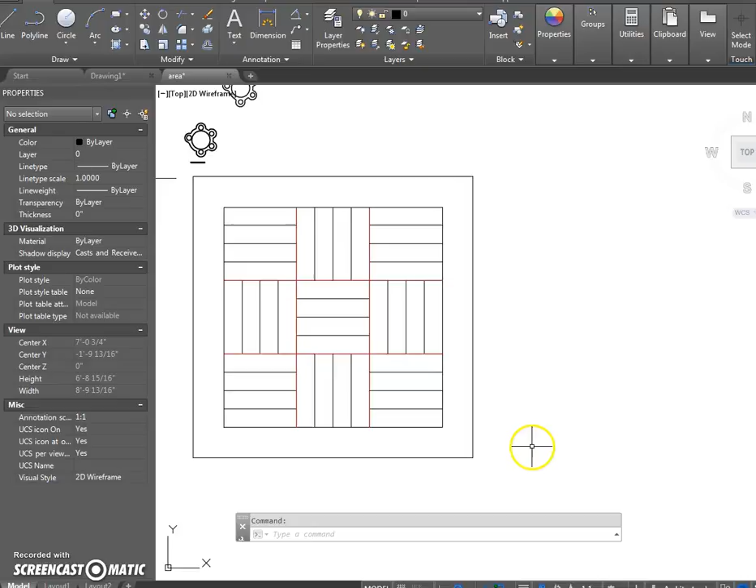Here we go again. All right, so you got these two parts done. Now we're going to do this guy right here.

A little bit different from what you're used to because you're going to use architectural measurements on this one. So the first thing you have to do, yours will say decimal down here at the bottom. Move your mouse down here to the bottom, see this arrow, and click this to architectural. When you do this, you have to type in the actual feet symbol, otherwise you have to convert to inches. It's entirely up to you.

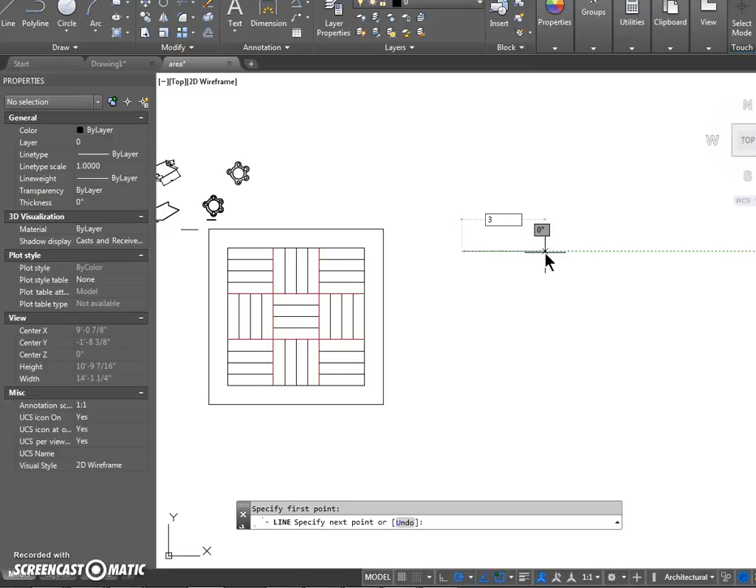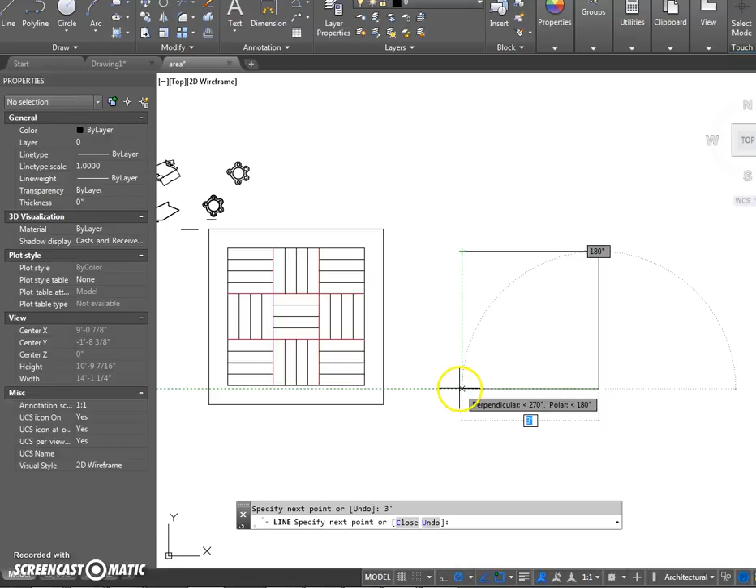Now I'm going to use the O track here to save myself a little bit of work. I'm going to touch this, not click, touch. You see that line, that's the O track. I've gone over this once, but here it is again. So click here, move it up, and click there. I'll give you a second to get that caught up.

Hopefully you're good. All right, so now we're going to offset this. Type an O enter for offset. Hopefully my volume is loud enough on this thing, if not crank yours up. 5-inch offset. Click here, outside. Click here, outside. Click here, outside. Click here, outside. Next question you ask yourself is, how do you attach these corners?

We're going to do a fillet. There's a little bit of a different way to do a fillet than what you guys are used to. You've only done one once, so you shouldn't be used to a whole lot. If you type an F enter, there should be a radius on there. If you set radius to 0, you can click your corners and it will make a sharp corner. Press enter again - I'm just going to press enter again so I don't have to do multiple. Enter again, and there we go.

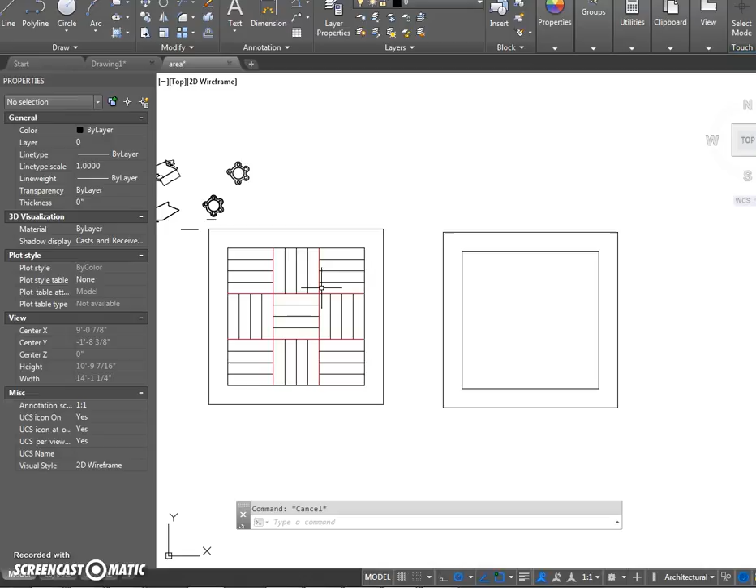Great use of fillet. Okay, next we're going to draw these red lines right here. I made these red just to help us see where we have to do some trim lines here in a moment. So I'm going to offset - it's 1 foot, 12 inches. Offset that over. Remember, you click, you go in the direction of where your arrow should go to, and then you click.

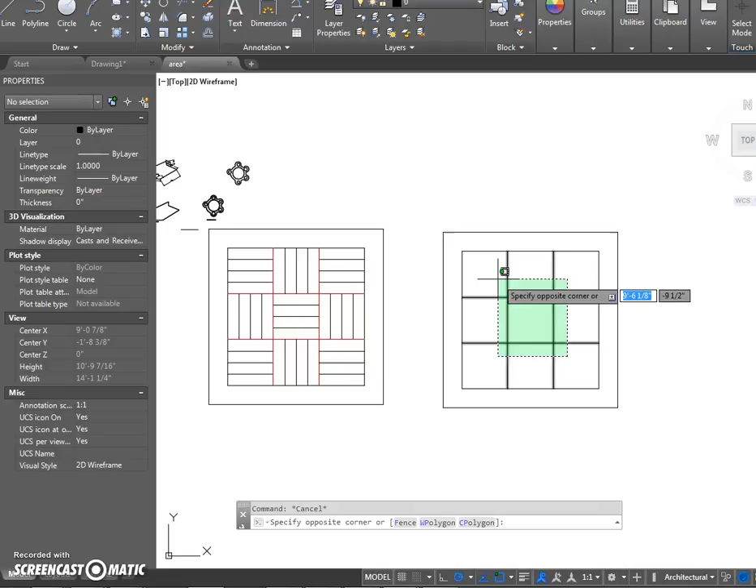Now I'm going to make these red just so I can see them a little bit better. So I'm going to highlight these - I left clicked, I didn't left click and drag, I just left clicked and I got these selected. You go to Properties, and if you click by layer and set this to red, it will turn all those lines red.

So I'm going to offset now, my offset's 3 inches. Follow me. Click here, go out. Click here. Uh-oh, I'm getting lazy, I'm going to hit multiple - much faster. There we go.

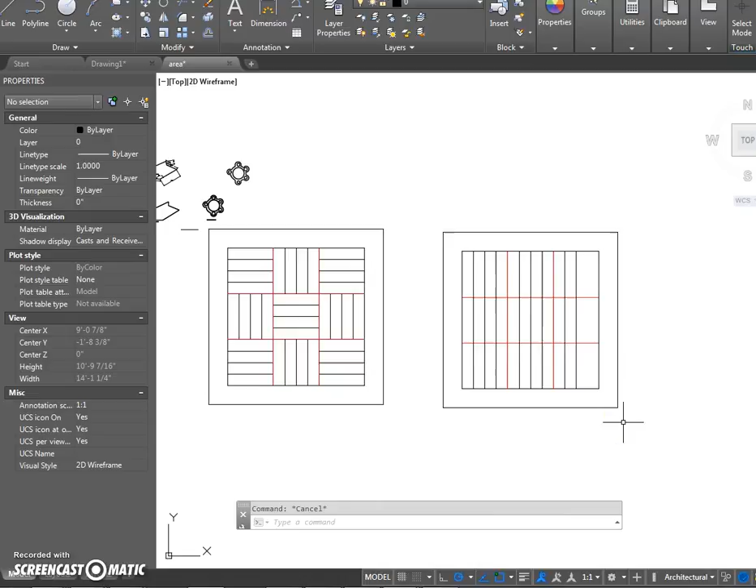All right, so watch this. Trim - I'm going to show you different uses of trim. This time when you do trim, press enter only 1 time. What you're going to do is you're making a fence, so everything I'm clicking now is a fence. It means it's only going to click what's in the middle of these. So I press the enter button now. Now I can click these up here and it won't affect those down below it.

Or I can draw a little box like this. Bump, bump, bump, bump. Oops, I messed up, looks like I forgot a line here. No problem - offset, move this guy over, and there we go. Oops, I missed these in the middle here too.

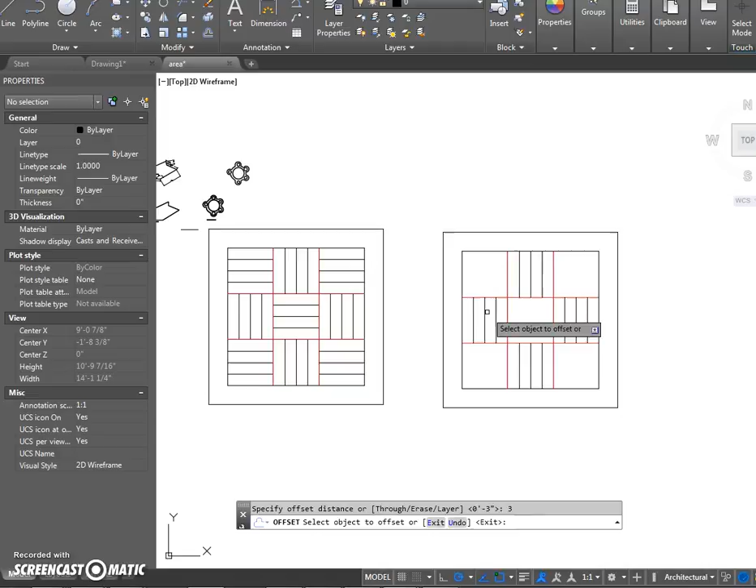Not a big deal. Okay, now we're going to offset going down. So O enter, 3 enter, click up here, multiple, and trim through these.

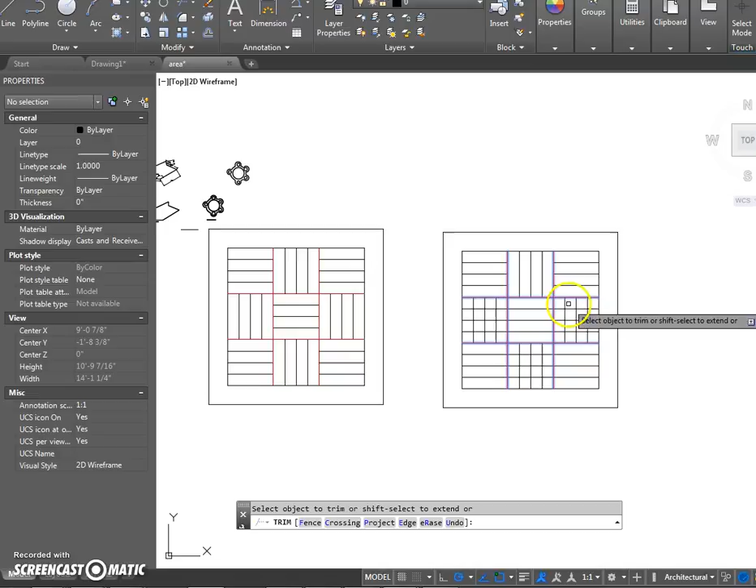Either way, one more time, TR - I'm going to click enter once. Choose my edges, these red lines right here. Press the enter button. And next we're going to just draw little boxes here so I can trim those. And that's beautiful.

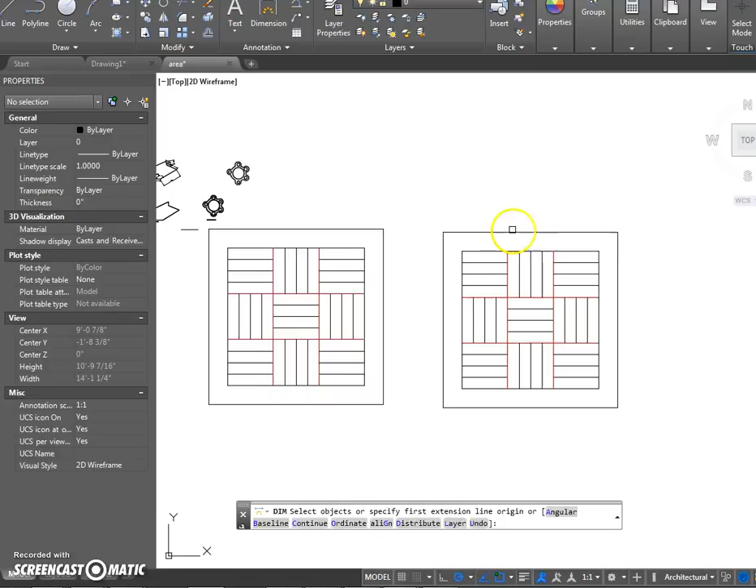Trim those, trim those, trim these, and you're done. Congratulations, and that's it - so these are finished. You obviously can't do the area on this, I'm going to trust it's done. The only thing you could do is you can put a measurement up here. Problem is it's going to be really tiny because it's not set to architectural inches, and I'm not going to go into that just yet. So just leave it as such. I know it's finished - job well done.